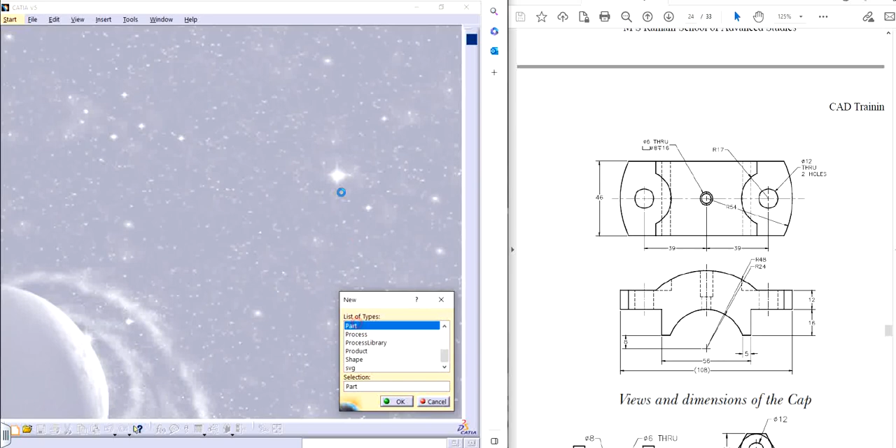We are going to design this particular face. There are two ways of designing it, either on the front face. I'm going to start right away without thinking much, and just use half of the profile to make this particular thing. I see there's a center which I can use as an origin if I need to.

Or no, I'm just going to start it from here, go straight up on the left, go straight up again. From the top, it should look something like that. Okay, makes sense. I'm just going to keep things a little bit simple here, I don't want to overcomplicate everything.

I'm just going to keep 39 and 39 from here, so from the middle till here is going to be 39. 39 right there, all right. And I'm going to move it here. I'm going to be making from the center to center of these holes, so I'll be making the curvatures from the top view.

For now, I will be making this particular profile, so starting from here, coming here, and going right there. Let's see, from there I'm going to use the profile again, go straight, then there is a curvature till here, something like this.

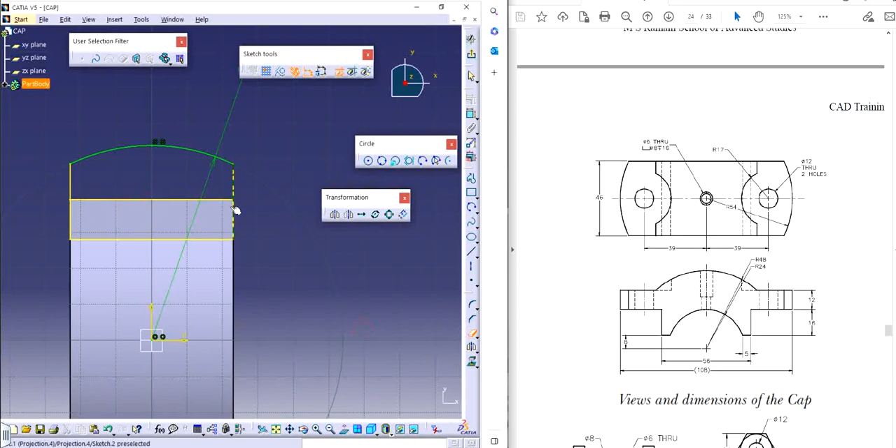Basically, there are two ways of doing the same thing now. Either I could pad it, that is one way, and follow it through the same way I should have done, or I simply project, I should have projected this line and trimmed off this extra material right here. I don't need this, right? And I can mirror this entire profile, whichever way you like. I mean, it's not that big of a concern, I'm just trying to show you some way to get things done, right?

I exit out, I pad it. Okay, I'm going to use reverse direction, and it's going to be up to a plane, and this is going to be the plane itself. I'm going to click OK. That's how it's going to look like.

So from here, I need to make sure that I get rid of these particular surfaces. Okay. So now the important things, right?

We will be making the holes all together, like the small hole in the middle and then the two holes on the sides, because they are going to be through. So this one goes at 12 diameter at two places, and the location is 39 from the middle, right? 39.

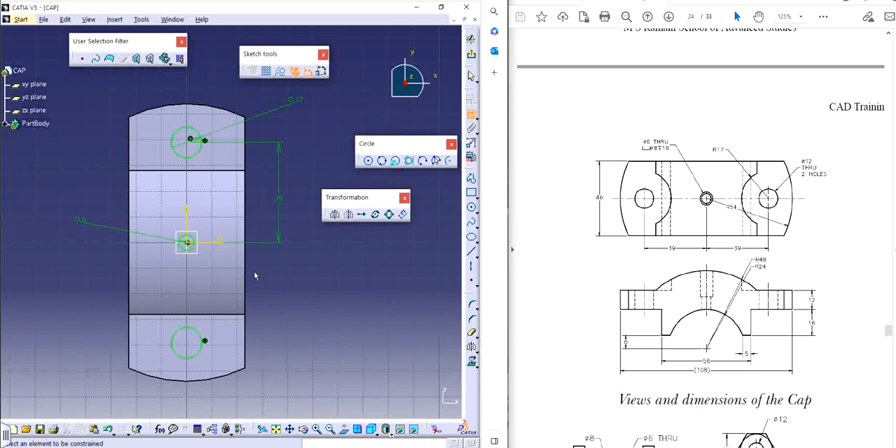I'm just going to mirror this right here with respect to the middle. Going to dimension the middle hole as well. This is going to be 6. The small one is going to be 6, so that one is through hole. So these are going through all. So I can do up to last, no problem about it, right?

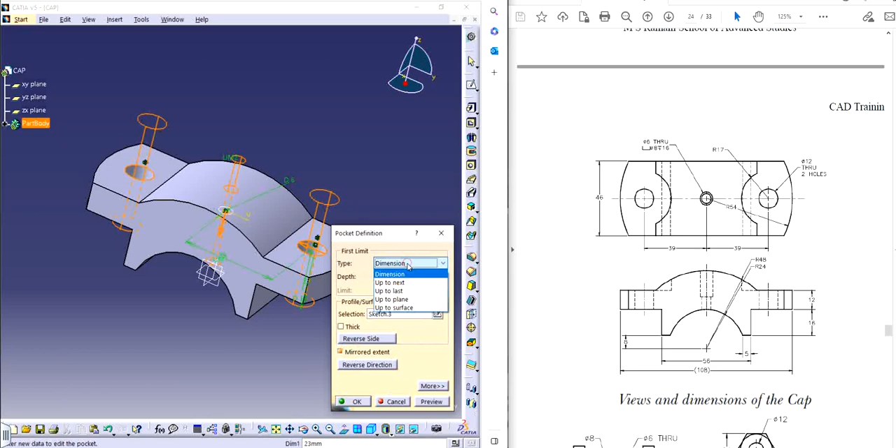Click OK. Oh, oopsie, my bad. Okay. Yeah, I mean I can do dimension and mirror extent and up to last, both sides. Yeah, that makes sense. This one looks good.

I'm just going to save it quickly. Cap, that's fine. So now I have to make the other one, but before that, what I will do is I can just get rid of the entire profile, right? Because this bunny ear shape needs to be there.

So I project this side and I make a semicircle kind of thing. 1 point here, 1 point here, and one here. Right here, I dimension it. The radius is going to be, oh, oopsie. The radius is going to be what? So radius is going to be 17.

There we go. And this is going to be coinciding right here. And from the middle, from this point till this point, it's going to be 39 again. There we go, perfect. And I'm going to trim these extra lines on the side.

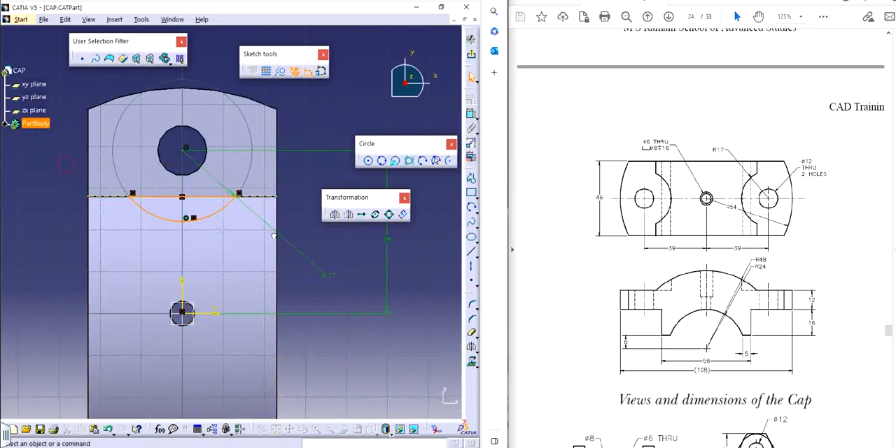And I'm going to mirror it with respect to the middle right here. Alright, and I'm going to pocket it. And it's just one side, so the reverse direction, just one side need to be trimmed off. That's good. And also the plane that I was making.

So what I can do is I can offset a plane. Alright, you can offset a plane, offset a plane. Plane is going to be somewhere there. There we go, we have it. And we are going to offset the plane somewhere.

Okay, normal to tangent to surface. This is fine. Point, point. There needs to be a point as well. It could be any point, not a big deal though. Okay, point, first of all, point. Let's make a point anywhere on the surface.

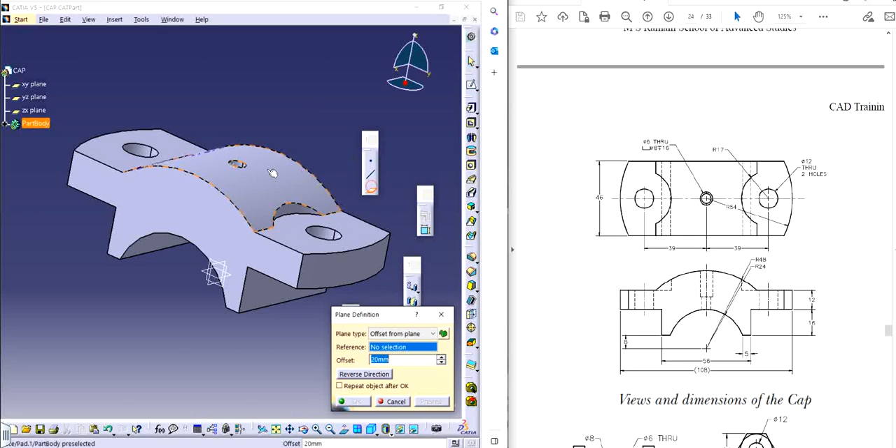Okay, distance 0. We have something, right? So I'm just going to use plane, tangent on this point. We just need some plane to make this thing work. So it's not that big of a deal, we're more concerned about where to make the hole, right? I'm just going to project this, the smaller surface, in case of having a reference construction element, and

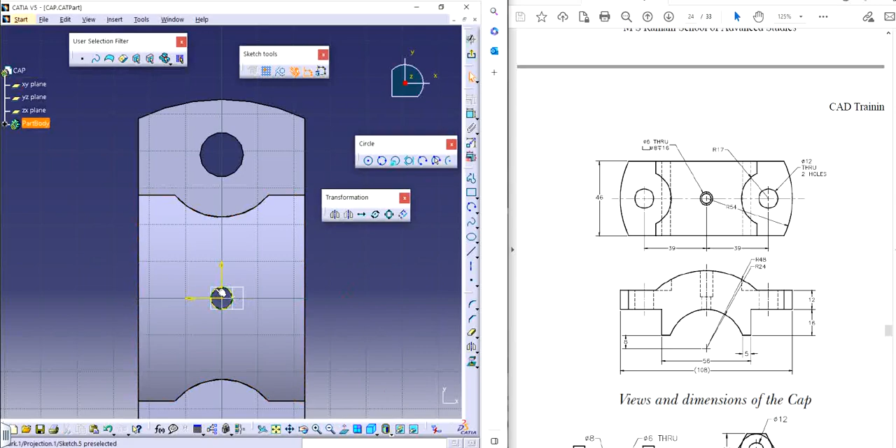We will make a circle right here. And there we go, it's going to be 8, and that is going to have a distance of 16 to go. Pocket of 16. Oh, reverse. Oh, my bad, reverse direction. Not up to last, dimension 16. Oh, my bad.

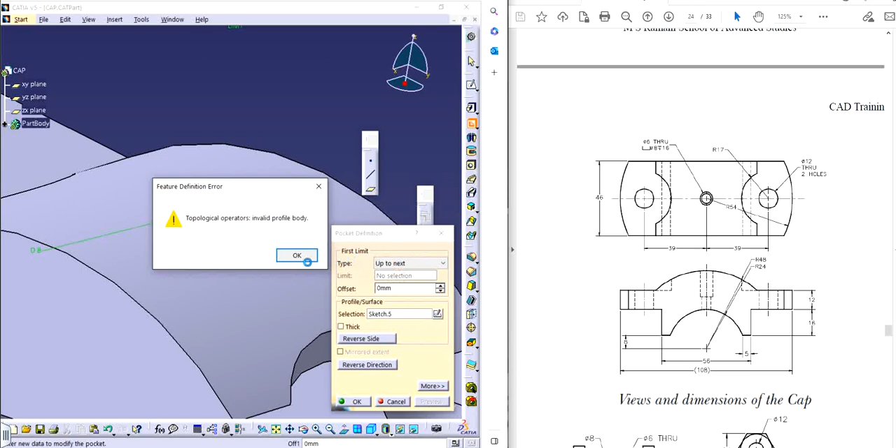Okay, let's see the selections there. Exit out, pocket, dimension. Oh, not this. Dimension, right? Reverse direction. Looks good. And the distance to go is 16. There we go, looks good.

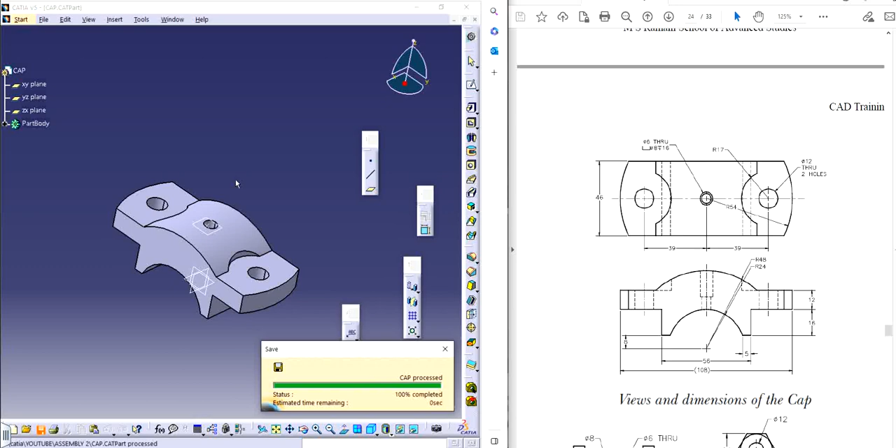Looks perfect, looks really good though. So these are done, right? So that's pretty much it for the cap part.